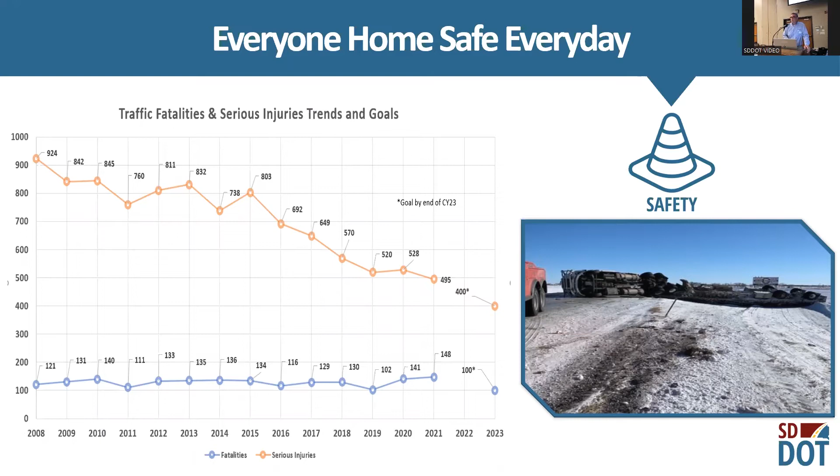So as we look at safety and behavior, some things we're trying to do from a department standpoint is focus on aspects such as rumble strips, things that aren't necessarily a transportation infrastructure element. They're not a bridge, they're not pavement, but they're things we're putting into the system to help with those behavior aspects.

In the upper right-hand corner, you see a picture of something called a high friction surface treatment. We've got two seasons in South Dakota: construction season and winter. When winter comes, we get icy and snowy conditions.

Our high friction surface treatments are a specific treatment in a specific area. The lower right-hand corner shows what happens: an epoxy or glue goes down on top of the pavement, then a very hard abrasive aggregate goes on top of it.

For the installations where we put in our high friction surface treatment, we've seen an 80% reduction in crashes at those locations. It's a very expensive technique, but it works very well, a great opportunity for us to help build better lives for better transportation and get everyone home safe every day.

The lower left-hand corner, I guarantee everybody's felt one of these: that's a shoulder rumble strip. With our shoulder rumble strip installations, we've seen a 20% reduction in fatal crashes, pre-installation to post-installation. Now, 20% may not seem like much, but our number one fatal crash in South Dakota is a single vehicle run-off-roadway crash. So if we can reduce that by 20%, we're helping bring people home safe and healthy every day.

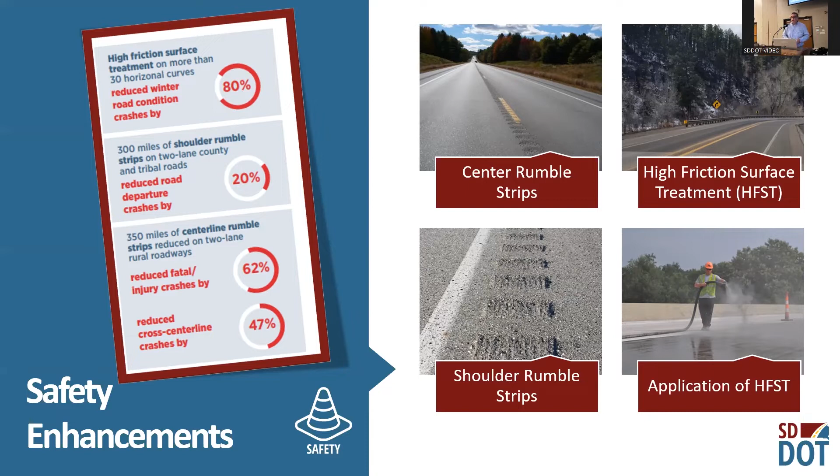Again, as we look at innovations and ways to make better lives through better transportation, focusing on new ways to deliver products and get people home safe is really what we're trying to focus on. If we have a safe system, it's wonderful, right? Everybody wants a safe system, but we also want a reliable system. In my household, we measure distance and time.

We live in Pierre, in the central part of the state, so we usually travel quite a bit, whether it's to Rapid City, Sioux Falls, Brookings, you name it. Every time we get on the road, it's not really a question of how far is it, it's how long is it, and for the most part, it's pretty darn close, pending bathroom breaks or how much water we brought with us.

We can measure distance really in time. For Rapid City, from our doorstep to the city limits, it's going to be around 2.5 hours, 2:45. We can plan on that, depending on bathroom breaks again. That's a reliable transportation system.

I guarantee most of you came here tonight and asked, how far is it to my destination? You probably measured that in time, not distance. That's because our transportation system is reliable. You get from point A to point B, you know it should only take you this long, and it generally works that way.

Hopefully you looked at the 511 app before you left and planned your trip, knowing it was going to take you 2 hours instead of an hour and 35 minutes. Again, a great tool to make sure we have that reliable transportation system.

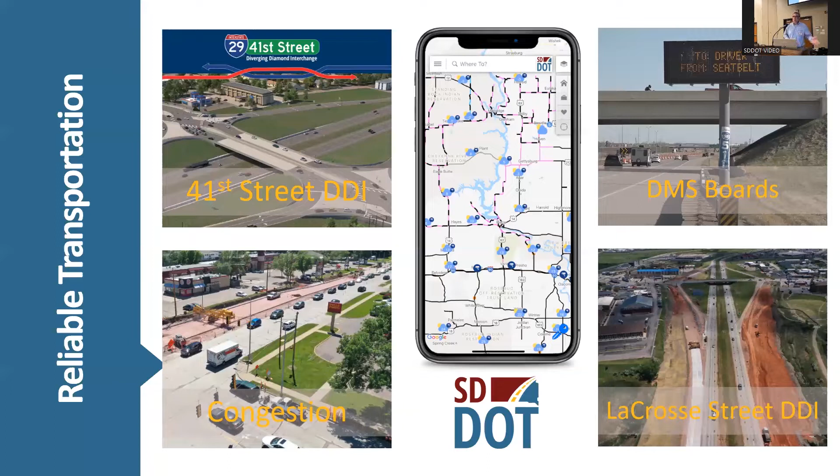The lower right-hand corner is our LaCrosse Street diverging diamond, which will actually be the first one in service. Hopefully we'll be up and running on it this year. Again, we're looking at new ways to make a reliable transportation system for our customers, so when you're going somewhere, you can expect a pretty good reliability to get there when you expect to. Of course, we talk about safety and reliability, but there are physical assets out there too.

I love this next slide, it's actually a picture of all the structures in South Dakota, over 5,700 public structures. You can actually see the tributaries and creeks by looking at this picture, you can see the Big Sioux River, the Jim River, just by the number of structures we have. 5,700 bridges for the population we have in South Dakota, that's a pretty heavy lift.

Our commission has worked tirelessly for a number of years. The implementation of Senate Bill 1 developed the Bridge Improvement Grant Program, which helped provide structure replacements for our local governments. That program has continued to grow over the years, and we've also included a federal aid local bridge replacement program.

We understand an interconnected transportation system isn't just a nice thing to have, it's a necessity. It doesn't do you any good to grow the grain in your field if you can't get it to market, so that interconnectedness is important as well. This year, our Transportation Commission provided $33 million for the bridge improvement grant program.

Currently, or historically, it's been at about $15 million. They also provided an opportunity for a 100% local federal aid bridge program, $6.75 million, almost $40 million worth of local government bridges coming up, hopefully this year. So again, working with our local partners and also working with our counties and cities to ensure that we can help to build and maintain that transportation system into the future has been a focus for us.

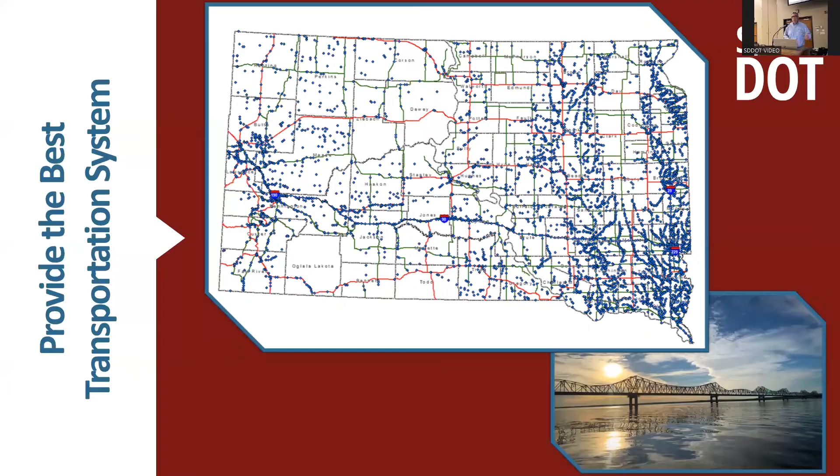We've done a very good job of maintaining our assets. For a bridge that was supposed to last 50 to 75 years, a lot of those bridges are lasting longer. We're seeing our structures that are in relatively good condition. In fact, 95% of our bridges are in good to fair condition today in South Dakota for the state system. But we see this wave coming and we know we have to plan for it. The sheer volume of structures that are coming up, needing a replacement, we're needing to move ahead and start getting some of those in earlier rather than later, waiting for that big wave to hit. Again, by focusing on making good transportation decisions and good investment decisions, we can flatten the curve and maintain the great transportation system we have today.

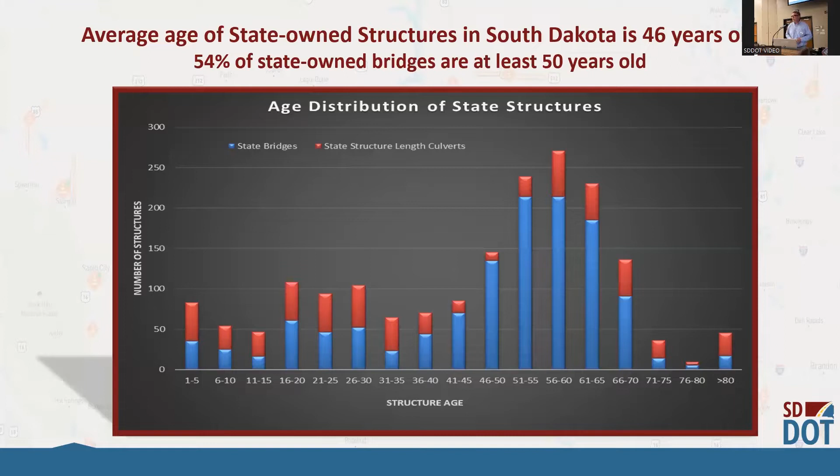We had some pretty big rains here in 2019. We had a lot of water come through that caused a lot of damage, especially in this area. Now, as we look at our structures and what we're building for, it's great to build a bridge deck or barrier to last 75 years, but let's make sure that it can also handle those big drainage events, especially on the state system.

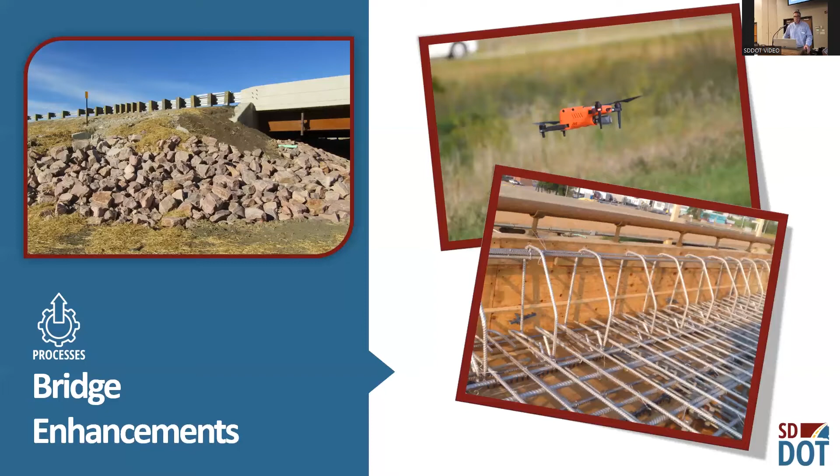Again, looking at better ways to deliver that transportation system to our customers, I'd be remiss if I didn't talk about our pavements. This is a graph of our pavement condition over time, going back to 2008. The blue indicates pavements in excellent condition, green is good, yellow is fair, and red is poor. As you can see, our target level is to have 80% of our pavement in good to excellent condition. That's our highest return on investment.

It's healthy to have some pavement in poor condition. Like I mentioned earlier with the bridges, all assets at some point in time need to be replaced. Same thing with our pavements and our sections of the highway. So some of those pavements are going to be in poor condition, some are moving from fair to poor, and that's natural progression. But if we can maintain our pavements at 80%, we feel like that's our highest return on investment. And you can see our projections after the passage of the IIJA, we're projecting to be able to maintain that level into the future.

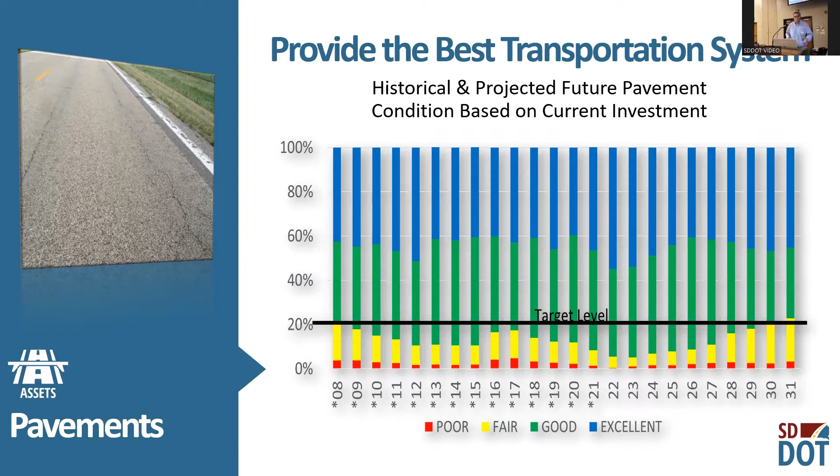So again, we're in a good position from a pavement standpoint, but we're always looking for ways to get better. Enhancements and innovations, as you see on the screen right now, is intelligent compaction, in the upper left-hand corner. Thermal imagery, along with roller patterns, help us to ensure that we're getting adequate densities on our asphalt pavements.

Upper right-hand corner, that's actually an asphalt wedge joint. It allows us to get better compaction at the center part of where the two asphalt mats come together. Lower right-hand corner, next generation concrete paving, faster construction, better quality at the end. We're looking at new and better ways to build transportation systems into the future.

So I went through that fairly quickly, and I appreciate the fact that nobody fell asleep on me, but I do appreciate the fact that everybody was attentive here. We are passionate about transportation. I'm going to turn it over to Jay. He'll go through some projects upcoming in the area, and then I'll come back up at the end. Jay?

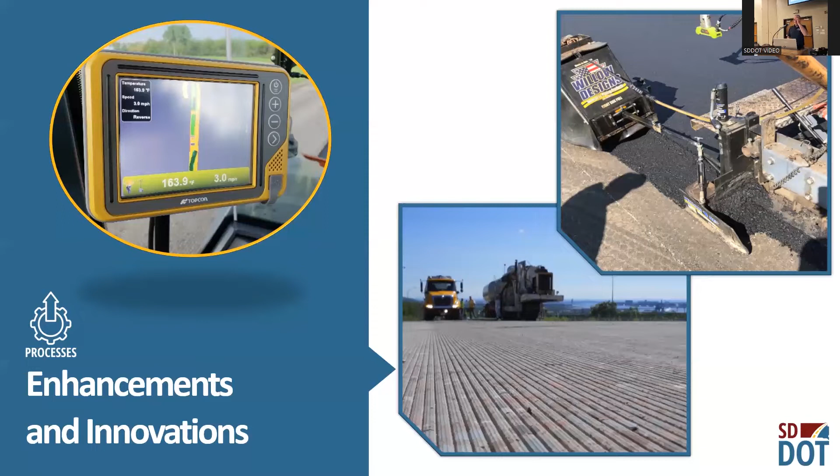Thanks, Mike. Typically, the region engineer does this. I'm not the region engineer. My name's Jay Peppel. I'm the, oops. Do I have to, oh, there we go. I'm sorry, I don't even know how to run the computer. My name's Jay Peppel, I'm the Mitchell area engineer. And Travis couldn't make it tonight, so Harry and Greg and I did paper, rock, scissors, and I'm not very good at that game. So that's why I'm standing up here. So you'll have to put up with me.

But what I want to do a little bit is go through some of the projects we have. I want to describe our area a little bit, who we are, and some of the major projects that we have. All of the projects are on the handout that you guys got earlier.

But I want to just focus on some of the higher ones and talk a little bit about those. As far as our boundaries, the Mitchell region represents 22 counties in the southeast part of the state — Chamberlain down to Yankton, down to the Sioux Falls area, those types of things.

Area-wise, there's 3 area offices within the Mitchell region: the Sioux Falls area, that's Harry; the Yankton area, that's Greg; and then myself here in the Mitchell area. There you can see us. I don't know if we're the most photogenic bunch, but I guess you get what you get with a bunch of engineers.

As far as the projects go, we'll talk about projects from 23 to 26. As far as bridges, we've got 42 new structures going into that time frame, and 106 structure rehabilitations.

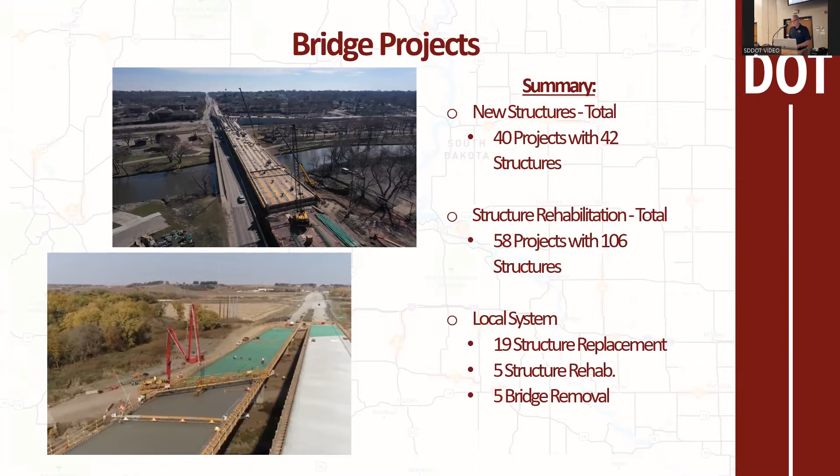In 2023, grading-wise — you'll note this, if you can see the screen — this is actually on the DOT's website under the STIP program. Colors represent years, triangles represent things like bridges, paving, others. But I'll just highlight a few of them.

When you look at the STIP map, sometimes it'll say 2023, 2024, but construction in 24, 25. What that means is the fiscal year the money was obligated might differ from when the actual construction happens. In your handout, it'll actually show the construction year for those projects.

In 23, the grading section, we've got 11 projects programmed at over $300 million, total length of 47 miles. Some of the highlighted ones I'd mention...

Since I'm the Mitchell area engineer, I can talk about Mitchell projects, right? So we'll talk about the 37 north of town. The first one is a $23 million urban reconstruction. That's one where the money's obligated in 23, but the construction actually will be in 24, 25 — reconstruction all the way from North Main to National Guard Road. It'll include a new bridge and pedestrian walkways all the way out to National Guard Road.

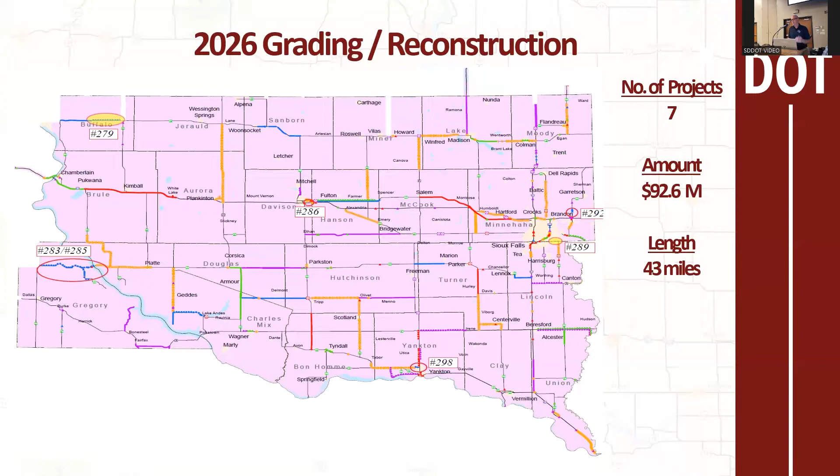And then 297 is South Dakota 34 from Woonsocket to Highway 37. What we'll do is the concrete up there is falling apart, so we're going to bust that up and put a new top on it. And then there's some areas up there with gravel shoulders. We're actually going to be adding asphalt shoulders to those.

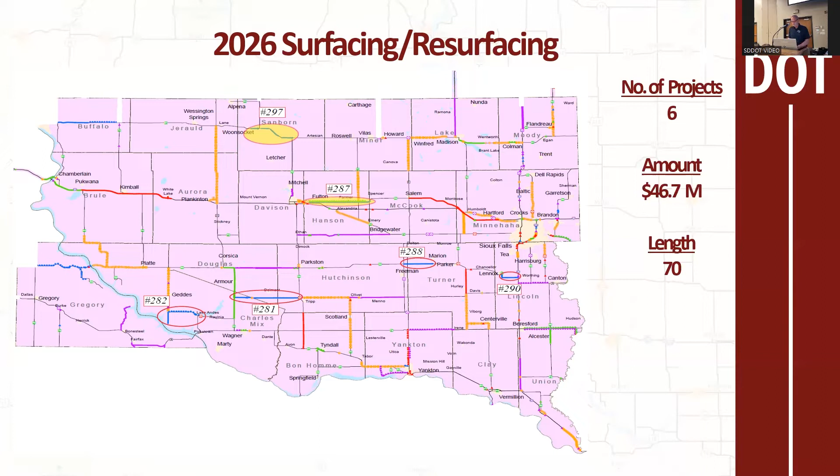Mike had mentioned that safety is very important. I would say it's our number 1 goal. Safety is very important to the DOT, and it should be. Some of the improvements Mike had mentioned were intersection improvements, turn lanes, signing, rumble strips — any improvement we can do to a highway is definitely there. Maybe something I'd like to mention is number 7 there.

Variable speed limits, that's one that's come up in different areas. This is from Flandreau to Brookings. So they're going to be putting variable speed signs with variable speed limits on that. It'd be similar to what they're proposed doing out by Tilford, out there by Rapid City.

25 and 36 are roadway lighting projects. US 18 through Burke, we're going to put some lighting through Burke. And then also some I-229 median lighting over there.

45 is traffic signals. So the one in particular on the 45 is on South Dakota 115 by the Harrisburg High School. They're having trouble getting in and out of there, so they're going to put a light up there for them.

51, Mike had mentioned some of these high friction surface courses. This one's on I-29 north of Dell Rapids, improving some curves and some bridges up there.

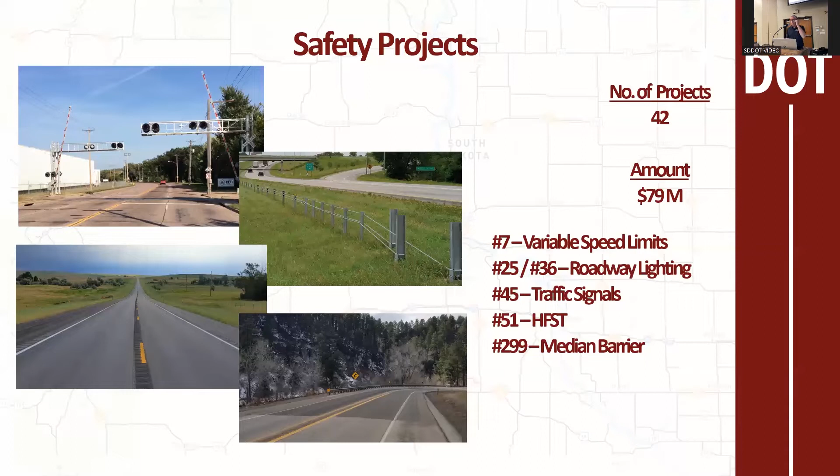299 is a median cable barrier. You see these a lot in Minnesota, where there's actually a high strength cable down the center of the median. So that'll be from the Harrisburg exit to the I-90/29 junction. And then there's also a couple on I-90 that they're looking at in the future.

So in summary, to end this thing, we got $1.4 billion in the next 4 years just in the Mitchell Regional. It's quite crazy when you think about it. But we'll get her done.

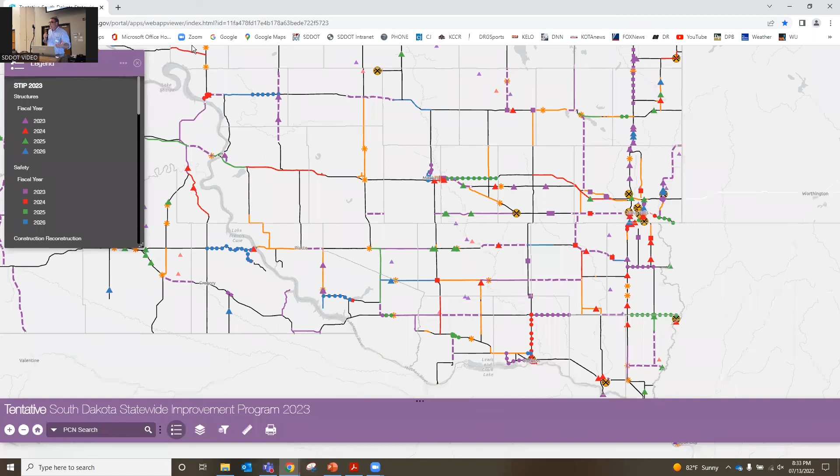It's given us a great opportunity to engage with the electrics and others across the state, trying to get an idea of capacity, grid capacity, how this could work. This is something we're seeing the consumer market shift to. If you're familiar with major brands like the Ford Lightning, I don't believe you can actually go purchase one - you put your name on a list like many vehicles right now to get one. But the consumer market is really driving the EV end of things. So as the consumer pushes in that direction, how can we be reactive from a DOT standpoint?

Now, that wasn't directly related to the revenue component of things. As Senator Hunhoff mentioned earlier, the fuel tax - when you put fuel in your vehicle, you pay a tax to help pay for the road user fee. So what does an electric vehicle pay? Currently, the electric vehicle registered in South Dakota pays an additional $50 each year for registration that goes in the trust fund to help offset that cost for use of that roadway. How does that capture a cost for somebody living in Minnesota, maybe coming through South Dakota, who would have purchased vehicle or fuel, but it's not captured that way?

And it's a big question nationally right now for a road user charge. What is a road user charge and how could it work? Obviously technology is there to show where folks are driving, but there's privacy concerns with that. So that's being really discussed at the national level right now. And we're trying to work our way through that as well, because if that inversion point does happen in 2035, 2045, the roads are still there. Folks are still going to need to drive on what's a revenue source in order to get there. So great questions, and I wish I had a great answer for you, but I guess the best I can say is we're working on it. We're trying to look at this nationally as well.